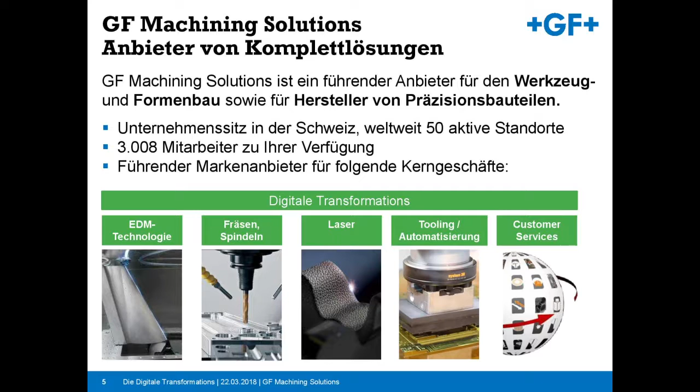And of course, a big part of our activities concern customer services. You will see that a big part of our Industry 4.0 solutions are coming along the service division.

So here we have an example of our product that you can see downstairs. If you go to the GF Machining Solutions booth, you will see different types of machines, in particular the wire EDM machine, the die sinking EDM machines, examples of our milling machines. We don't have it here, but this technology is becoming more and more popular: laser texturing and additive manufacturing.

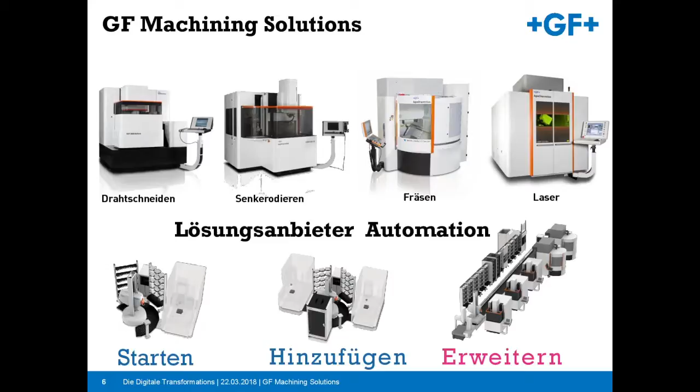We are also providers or suppliers of tooling and automation solutions, robots, and of course, integrating our machines into the factories in order to make the whole process intelligent and automated.

So we are present around the world, but our main factories are in Switzerland, in Geneva and Losone, south of Switzerland, and we also have factories in China for the local market. We have more than 50 sales and services companies around the world.

So what is our Industry 4.0 strategy? We all start with a strategy. What is our vision? Our vision is mainly to focus on providing a solution at 3 levels.

We believe that the problem that Industry 4.0 addresses is basically information. What is new that you have in your pockets, and that is really, really important now, is the information. Whenever you need information about where to go, what train to take, what bus, if you need a taxi, if you need information about leisure activities, then you have everything in your pocket. And this is the real revolution. You can have intelligent information in your hands.

So the real industrial revolution, Industry 4.0 in manufacturing, is also about information. It's not really around the smartphone, it is around the machines. And what are the big issues with these machines? The big issue is that it is not as simple as a smartphone.

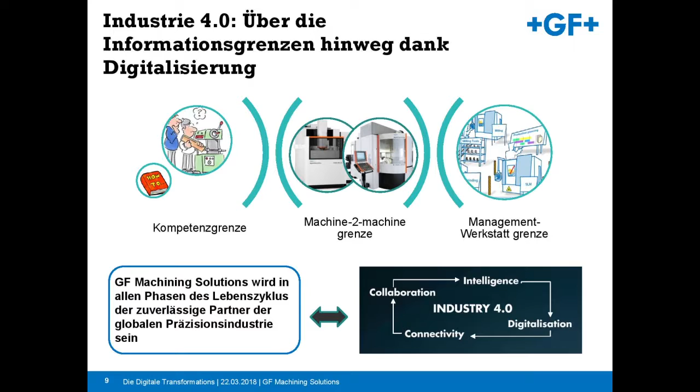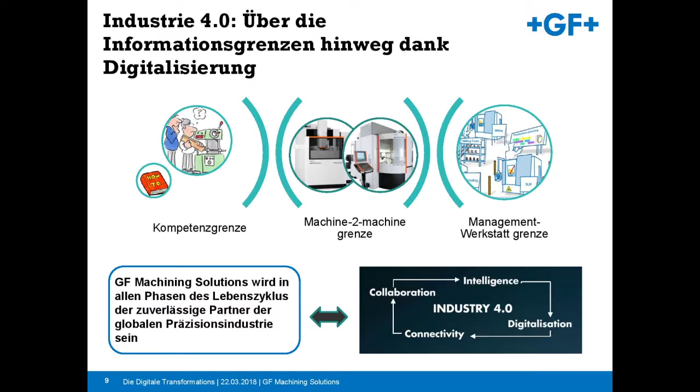So this is our strategy, and what we want to do is written in our strategy book. GF Machining Solutions will be the preferred partner for the global precision machining industry during all phases of the life cycle. That means during training, when you learn how to use the machines, during the execution phase, how you use and exploit them in the shop floor, and then how you maintain them. This is the full life cycle view where we want to be the preferred partner of the users.

So that goes in the following direction. First, in order to do that, we have to digitalize all the information coming from machines, which is not that difficult - these machines are fully digital. Some have analog components, but we can make them digital. Out of them, we have to connect our machines. We have to be able to extract and provide this information to different systems.

And then we can implement a different kind of collaboration - collaboration between machines, between engineers and machines, between machines and factory management systems. We have to break these borders of information.

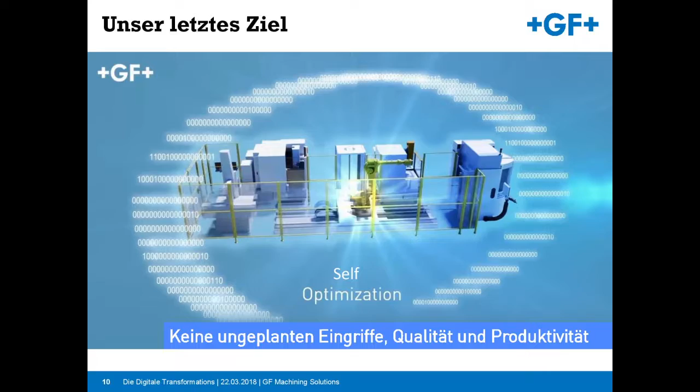So in the end, the vision is that we have a system able to communicate - machines able to communicate between themselves and with operators, engineers, and management systems - in order to go towards a system which is self-optimizing, able to adapt itself to what you need. That means having a system without unplanned interventions or maintenance that stop and interrupt your production process, giving you the highest quality and highest productivity. So that's easy to say.

How to do it? What we implement, in order to break these barriers of information, is what we call the IoT stack - the Industrial Internet of Things. This is exactly what you have in your smartphone, in your telephone now - the internet is going into every object we use. So this is exactly what we want to do: put the internet, the industrial internet, secure connectivity, into all our devices and components.

And this across different levels. As I said before, we need to break barriers between people and machines, but also machines and machines, and machines and information system management systems. This is exactly what this IT system, the IoT stack, tries to develop.

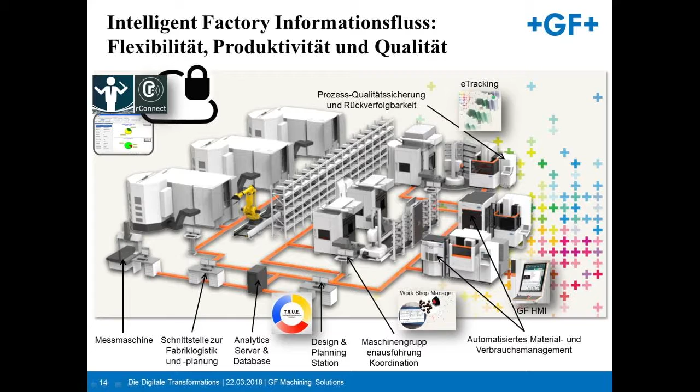Going into more detail on the first one, the T.R.U.E. solution, I want to underline that we try to develop a system that helps the machines communicate with each other. But what kind of data do they communicate? What is important? In this case, we have a partnership with Autodesk.

From the design stage, where you have a design of your part, there's a definition of the different technologies that you will use in order to manufacture it. For instance, if it is a mold, then you need EDM at one particular segment, you need another feature with milling, you need another feature with laser. So you have a software system with Autodesk that helps you define what are the manufacturing steps in an easy way.

And then we have the generation of codes. And the trick is here: the generation of code is not coming directly from the point where you have decided which technology you use. You do this after finishing the first stage of your process. For instance, in manufacturing of molds, you have to do some cavities with electric discharge machine, die sinking.

Then you need some electrodes. For doing these electrodes, you need milling. So what we do is define the code for milling, machine the electrodes, and then in an automated way use a CMM machine in order to measure the accuracy of the electrode.

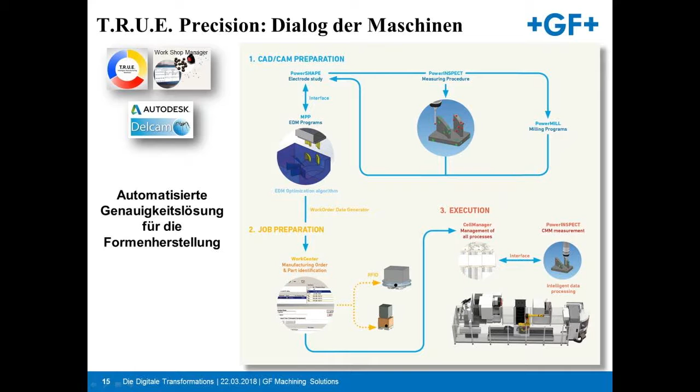So this is completely new, because you don't know what the result is. You have a few micro deviations on one side, but you don't know where. Then you measure automatically, and you produce a new code which compensates these deviations by another machine, and this in a fully automated way. This is what we understand by communicating valuable information from one machine to the other.

And then we see here a small video. You can see how this process is really working.

So you see this T.R.U.E. solution can be applied to the manufacturing of a connector. For doing this connector, you need some EDM processes because you have very specific details that you cannot do by milling. What you do is design the electrode for these EDM processes with the milling machine, taking into account the deviations from a measurement after the electrode has been machined by milling.

So these deviations give you information about how to produce the best code, the most accurate code, for making this EDM machine work. And this system is currently working, so you can use it.

You have to use our software systems, our machine systems, and a CMM system. In this case, we use a CMM from Zeiss, but any other CMM machines can be integrated into the solution. What is new is that we can now integrate this knowledge, because this is new human knowledge. Normally this is the kind of thing that engineers do at the shop floor in a very long way. You need a lot of expertise, time, people and resources for doing that. So we try to deliver a solution which is automated and easy to use. This is one very important example of how Industry 4.0 is going into manufacturing with communication facilities of machines.

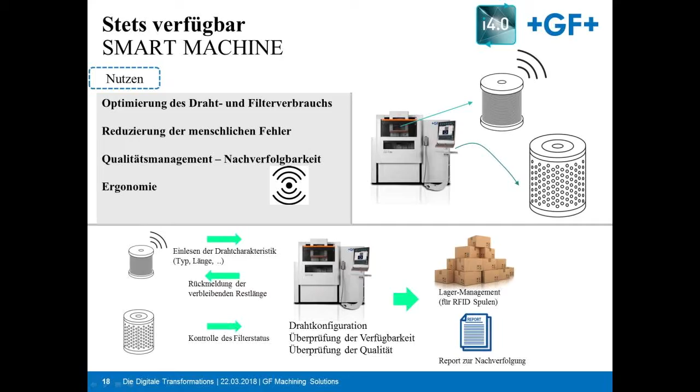You can see examples of these applications downstairs with the Cut P series new machines. The idea is to optimize wire and filter consumption, to reduce human errors, and improve quality. This can happen, and of course you have management and traceability and some ergonomics as well—easy to use systems. The idea is to have something which helps you have a process that is not interrupted.

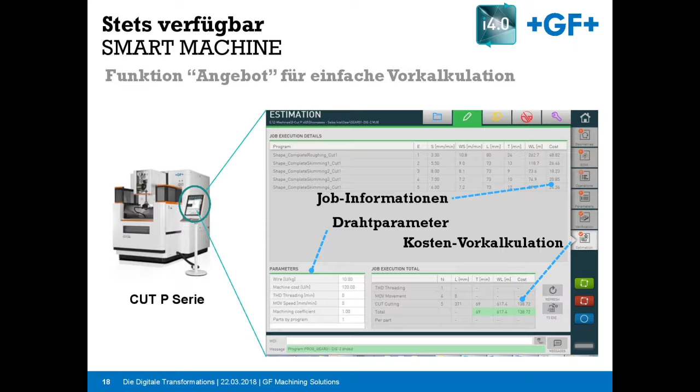We have interfaces at the level of the machine that help deliver this information, and some also help with cost calculations. It's also very interesting how much this process represents in terms of costs—that's important information for you in order to undertake this or that job with the following spool or not. Again, it's another way of communicating with the machines.

Then we go to the next level, which is the information from the shop floor to the management systems. Thanks to our rConnect infrastructure, we're now able to connect all our machines. All our different technologies can provide different types of data and information to this rConnect system in different standard formats. Then you can display all the warnings and messages, and you can also exchange information with our services remotely through this LRA, the Live Remote Assistance system, which is now available, and the messenger.

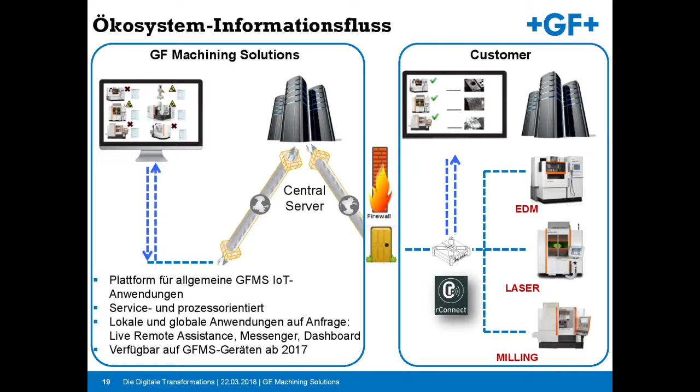That means all these important messages coming from your machines are now able to be on your smartphones. This is really fresh news. So we have here another way of supporting communication with management systems, because all this information coming from the machines, the status of the job, how much time is left, how much time this takes, can get to MES systems or ERP systems, in order to have an integrated system of intelligent management of a factory production flow.

This will come little by little. So we are developing standard interfaces, and then different types of MES and ERPs will be able to get this information in order to have the full picture of an intelligent factory, one that works without interruptions, or with minimum interruptions, which is able to replan in an autonomous way a different job with different machines. Many things will come out with this basic communication out of the machines.

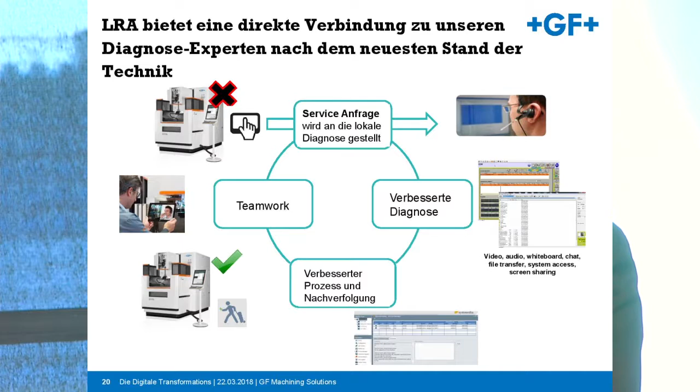I want to show one example coming up, which you don't see yet. What you can have with this rConnect system is that remotely you will have information or data coming from all the components of the machine. And here we have, for instance, very interesting data of the temperature, the torque, all the sensors, the accelerations, the vibrations, all the sensors that we have in the spindle.

Normally they are displayed in the interface, and you can have information on what's happening, how it's going on. And with some knowledge, you can say, there might be a problem with the spindle, or I should take care of the system now. So the systems will become more and more autonomous, intelligent, but first you will have the information available in real time everywhere.